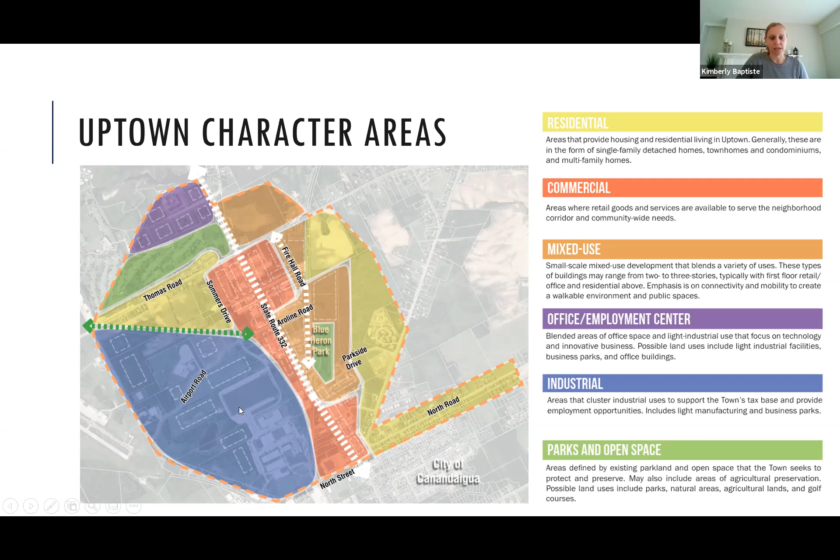So again, just a quick recap: the revised zoning we've been referring back to is based on the Uptown Corridor Master Plan, which included future land use character areas, which you can see here. The areas focusing on today include the areas in yellow, identified as future residential areas, as well as the Office Employment Center, which is the business park district, and then your industrial districts.

Starting first with the mixed residential, just a reminder, as we took that character area map and refined it into an actual zoning district map, you can see the areas designated for mixed residential indicated in bright yellow. So both sides of Thomas Road along Brickyard Road, and within the area immediately adjacent to our form-based code district. The form-based code includes the areas in red and this orangish tan color. So this is really a transitional residential area immediately surrounding the form-based code district.

Again, this really was, you have your multiple residence district already within your code. The overall use with some modifications and design intent are very similar to what we've talked about doing within this mixed residential district. So we use the multiple residence district as a base. Unlike the form-based code, which is intended to be its own standalone document as part of the overall town code, this district will be incorporated into your existing zoning code as a new district. So this will fit right into your existing framework, and all of the other references as it relates to other standards within your zoning code would apply to this new mixed residential district.

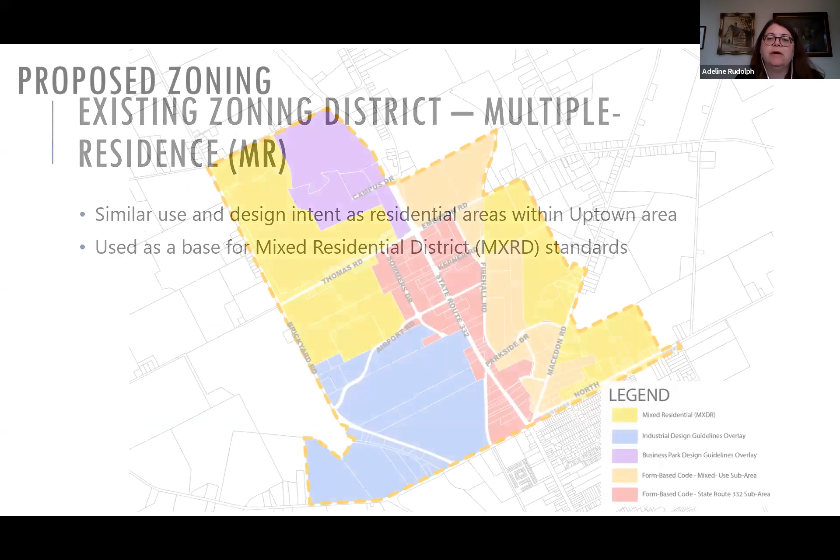Back to that map real quick, Kimberly. So we're discussing the yellow area, not the orange area, correct? Correct. The orange area is included in the form-based code, so this is the yellow area.

Kimberly, my other question would be, if you look at the plazas around 332, I know they're more occupied than what we have occupied in the city at this point, where Ryan's Liquor is. My question really is, is there a pressing need for additional retail? Because that strip mall model is kind of an old model, right? So are you talking about incorporating them inside adjacent structures similar to the residential look? I'm just trying to feel it out, I'm not a big fan of strip malls anymore.

No, but I think that's a good point. Because the form-based code district, which is the red and the orange, allows for a lot of flexibility with the range of uses, and it really is based on building type. The goal though being that that would help facilitate more of that high density mixed use type development, particularly in this orange area along Fire Hall Road, where you would see a combination of higher density residential combined with some supporting commercial uses.

While at one point we had originally thought about these yellow areas as primarily residential and really building on that mixed use district, going from maybe higher density residential to lower density residential, so you might have some multifamily and then transition to townhomes and then to single family homes.

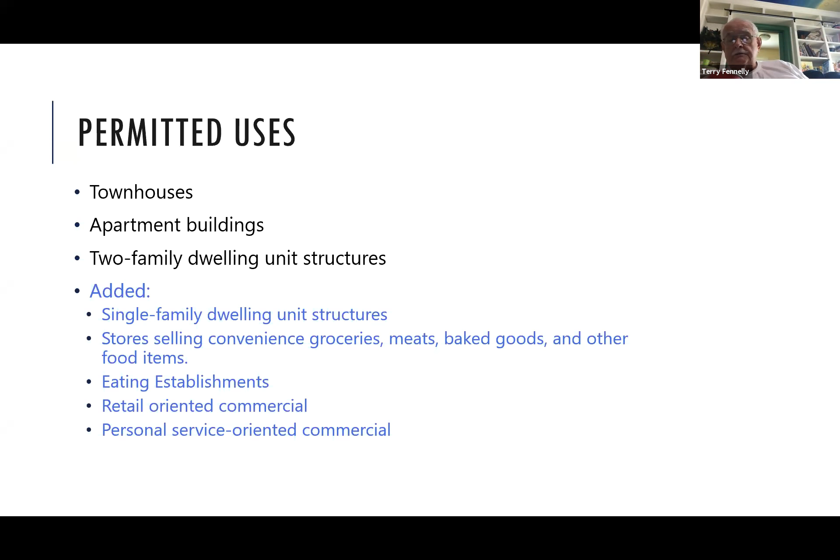I think Kimberly's earlier point about making size restrictions could really help. It's a very different situation when you get a very small, almost bodega sized convenience store as opposed to something a little bit larger. They have very different impacts on the neighboring properties too.

And I agree with both Terry and Adeline. It seems to me if you're trying to build a community, for example, one of those plots is relatively large, you would allow like pods. I think in terms of pods of commercial use, I can see having things within walking distance, which is a great thing to have in a community, having a bakery or a small store or a flower shop or a coffee shop, things like that. And I agree that those should be special use type entities.

Okay, so if it makes sense, why don't we go back and rework the language to add single family dwelling unit structures to the permitted uses. We will make the other uses special permitted uses, and we will integrate size limitations regarding the size and scale of those types of uses. Then once you get that language, you can dive into it a little more and see if it works and meets the goals for this district.

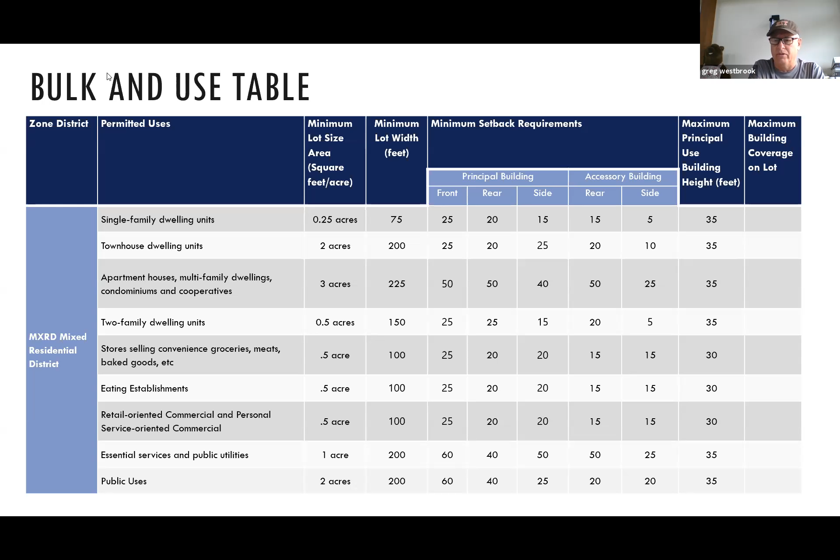And nowhere have I heard a conversation yet about traffic counts. So a burger place would never put a location on Emerson Road, across from whatever Thomas becomes on the other side, because the volume of traffic's not there. And we don't talk about it — I haven't seen it even in the forum discussions. There's just, and you got to plan for that.

I reflect on a few areas I've lived in my life. One is Celebration, Florida, which was a Disney town, all planned, 5,000 homes or whatever it was, and they always had clusters. I think that's what we're trying to describe here — a cluster that serves the community that lives inside that community, some additional benefits of that.

The other one was Tokyo. When you walk away from the station, you're walking everywhere in Tokyo, and the vision here is that we should be walking everywhere, especially to the parks, not getting in our car to drive. I think there'll be an openness to that.

But we also had public uses in here, essential services — we used to have a cop every four blocks in a hut, there all day long. My point is that if we can think collectively about traffic and the services needed for this concept, which I fully support, it may help us come up with a better result. That's all I'll offer.

No, and I think that's a great point, and really is the underlying premise of the Uptown area, where you're seeing concentrations of that diversity of uses within all of this red and orange area. Allowing for a diversity of commercial types, with those requiring higher traffic counts happening along 332, and those supporting a denser, expanded residential base in this outlying area, all within walkable proximity to new personal commercial eatery type uses along Fire Hall Road and Emerson Road.

So I think that's exactly the overall vision for Uptown, and the premise for creating that form-based code district. These outlying districts really support that form-based code district and ensure it is ultimately successful, allowing for that range of support services, because there is a more substantial residential base able to support it.

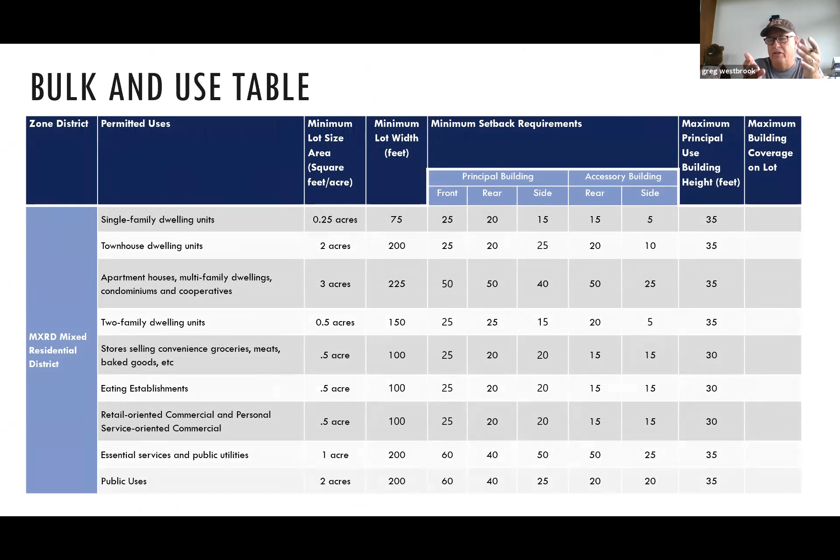Does that make sense? Yeah, but my comment is, I agree with everything you just said. Then there has to be a 'but' there, which is they're going to walk there. That's the assumption—we're going to use our feet more than our cars in this zone. And we've got to also make sure we have transportation capabilities for people that want to go. I don't know if you guys have ever run across 332 at prime time, it's a tough street.

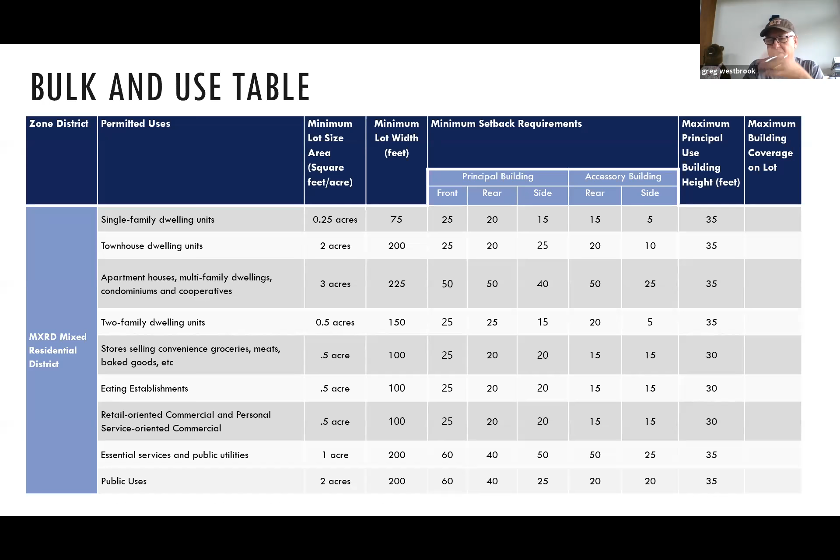Not as tough as 5 and 20 and Eastern Boulevard, but it's a tough street to cross. This past weekend I went to Maze, and my wife talked me into walking over to Tom Walls. You can't really walk over to Tom Walls—it's a bit of work because of the traffic and the speeds and all those kinds of things. So as we think about that, I think we just got to keep that in mind.

I'll stop there, just to say you've got to keep in mind that it's a complete unit, and let's play to the strengths of the unit versus trying to force a strength in a certain district in a certain way. That's all I'll say.

This is one of the areas that the Complete Streets group really was focused on also, Greg. It seems to me that would have to come into play.

Doug, aren't there some drainage issues up in this area that, for some reason, come into play when you look at maximum coverage, impervious coverage on lots? Seems to me we've heard Jim talk about some drainage issues there. Yeah, depending—am I mistaken?

This whole area, a lot of it is in the Route 332 drainage district, and we've got some ponds that are actually functioning as Route 332 drainage stormwater ponds, essentially, with a park built around them at Blue Heron Park. But there are some wetlands, some different delineated localized wetlands that have been identified on some of the parcels we're talking about for development, even on the map Kimberly is showing.

Kimberly, another question I have - I see you have maximum building height for an apartment house of 35 feet. My guess is we're not going to get too large of an apartment, but I believe the plan, correct me if I'm wrong, is to have the higher buildings closer to Fire Hall Road towards 332, and then as you transition back, the building heights get lower to taper into the other areas, right? Yes, and that's a good comment too, one for further discussion.

Recognizing we have some frontage on the roadway, with that form-based code allowing for higher heights, I think we went up to 65 feet - whatever the hammocks was at, either 60 or 65, I'd have to double check. The thought was, if we've got that higher height within the form-based code district, maybe we'd want to taper down as we get into the mixed residential district. But if that's maybe 45 or 50 for apartment buildings, not 35, that's certainly something we can modify.

That's a good point, Doug, because if you're going to do a 2-story building and you wanted to have a decent pitched roof on it so it looks aesthetic, so it looks nice, you might go higher than 35 feet.

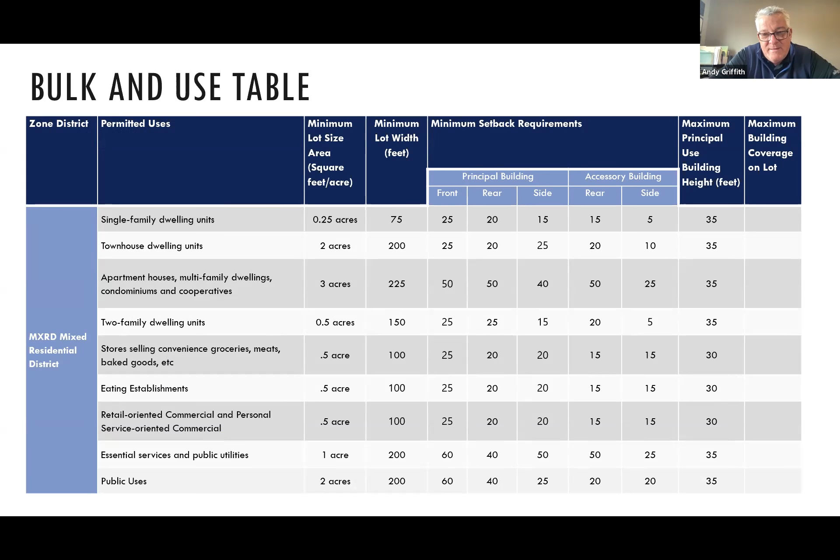Okay, well what we can do in the interim is actually put in percentages for both maximum building coverage on lot and maximum impervious surface, and then based on your more detailed review when you get the hard copies, we can discuss that further - how we want to ultimately land as we move forward at our next meeting.

Kimberly, in terms of maximum lot coverage, I know in the RLD I think we're at 15 and 25%, but that's because of the sensitivity of the parcels adjacent directly to Canandaigua Lake. What do other communities do for maximum lot coverage in a parcel that isn't adjacent to Canandaigua Lake, like what we're talking about?

Yeah, and because this is an area where we're thinking higher density, but we also want to make sure we're incorporating green space and allowing smart growth design, I would think we'd probably be, for impervious surface coverage, a maximum in like the 70% range - 60 to 70.

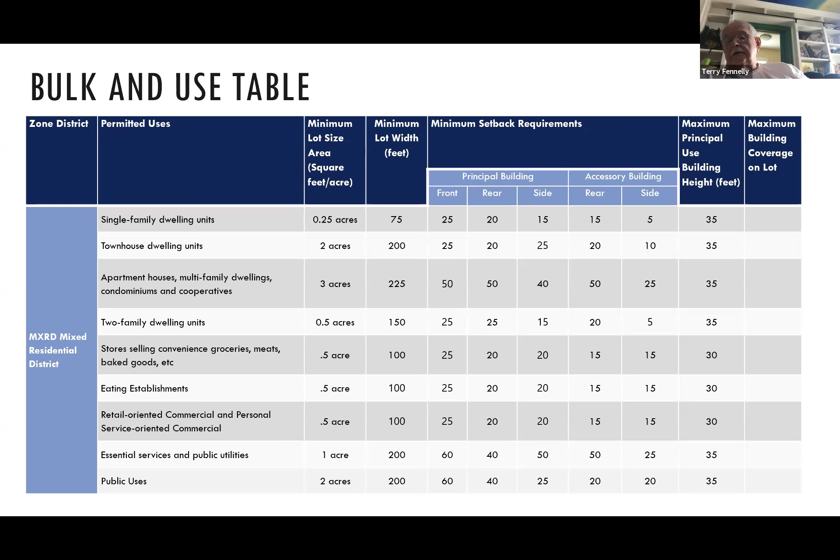Well, a quarter acre lot for a single family home is about 10,000 square feet, so you'd be talking about 7,000 square feet of coverage, which would be pretty high. I mean, just a typical 2,000 square foot house, if it's 2-story, probably has a 1,000-foot footprint and then a driveway.

Yeah, and the 60 to 70 might - I was thinking more of the commercial. You might be down to more like 50 for residential, because you're including your driveways, any accessory structures. But the other calculation is also related to what Terry brought up, which was stormwater runoff, right? And how that gets handled properly would be the driver - the ability to handle it in the community you're trying to put it in, right?

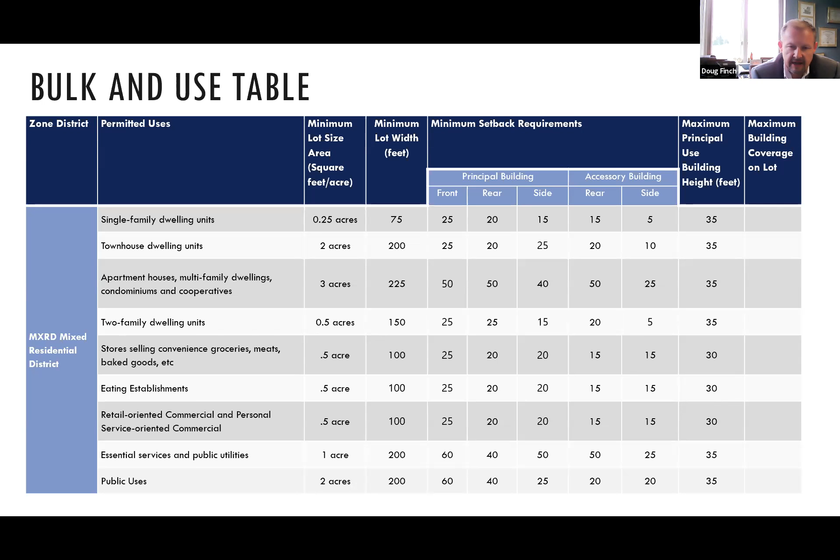Well, to that point, I like to think improvements and engineered solutions will help, but we have had, over the last 5 years - there's been days, I remember a Sunday specifically where Jim and I were out there during a heavy rainstorm and the water was up to our knees in places along this area we're talking about. So it does have to be factored in for sure.

A quick question - is any of this new mixed residential district touching the Paddleford Brook Greenway at all?

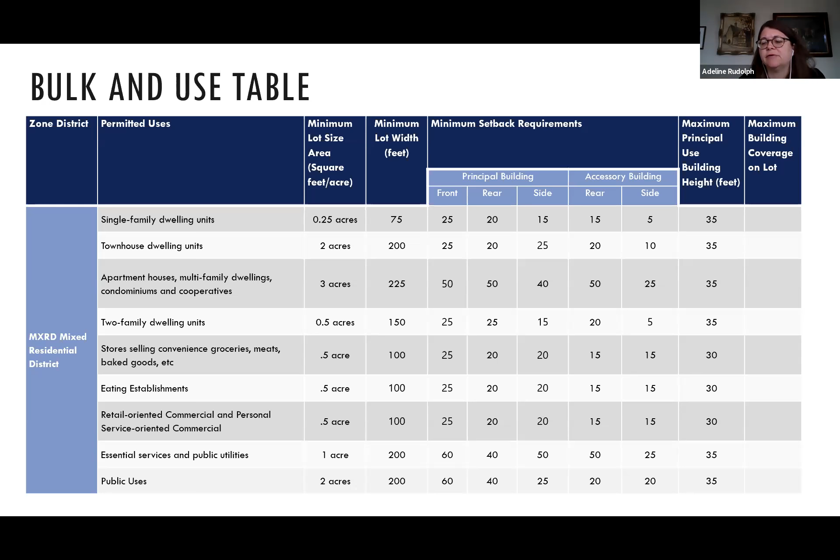So Adeline, the Paddleford Brook Greenway - this line follows Emerson Road, generally speaking, out at Sand Hill Road, roughly speaking. It kind of follows this northern line across from Campus Drive. So this one parcel in the tannish color would butt up to it, but the mixed residential would not at all be part of or adjacent to the Paddleford Brook Greenway. Okay, thank you.

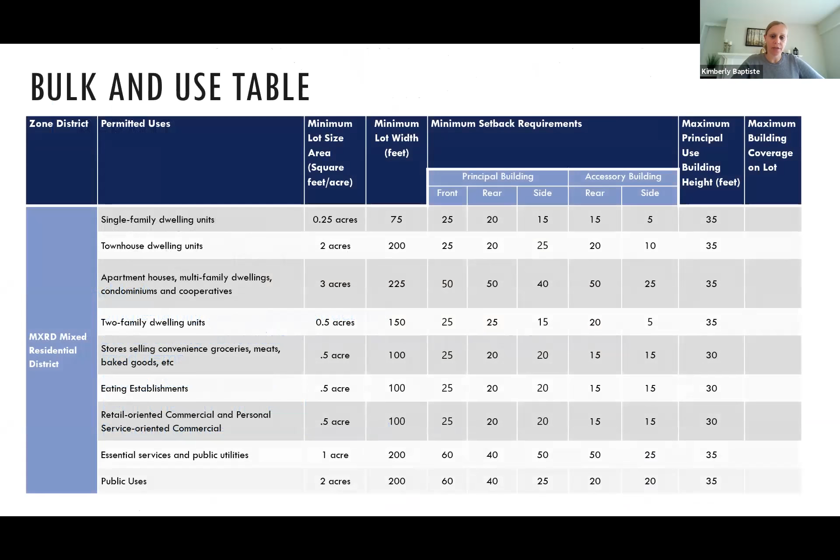Okay, and then just a couple other questions - these tie back to the fact that at least on the east side of 332, and even on the west side to a lesser degree because it's tucked in between the industrial districts, the mixed residential is adjacent to the form-based code district. So are there any elements from the form-based code that we want to continue into this new district? One of those being the requirements for outdoor amenity spaces for certain types of development.

So obviously this would not be applicable to a single family home or a 2-family home, but maybe for larger scale residential developments, a requirement for minimum outdoor space to support that residential development. So that's something we incorporated into the form-based code for mixed use developments.

Also, are there any special parking requirements we want to incorporate similar to what we've done in the form-based code? For certain scales of development, having requirements for bike parking, and requiring sidewalk connectivity within larger scale planned developments. So any thoughts on those, or whether you'd like us to add language supporting these concepts in the zoning updates?

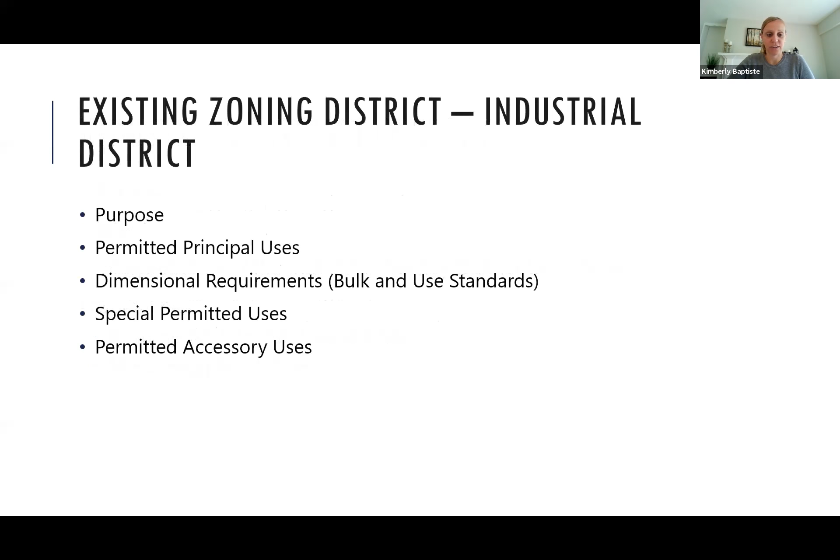So the intent of the overlay district is really to promote high quality architectural and site design that's compatible with the surrounding area, recognizing the surrounding area is intended to be walkable, inviting, and a mix of different types of commercial and residential uses. It's intended to promote safe, functional, and attractive development, and also encourages sustainable site and building design to reduce any negative environmental impacts.

So the building - can we make a comment? Sure. The architectural - go back to the prior slide, please.

The site plan encourages high quality architectural and site design. And yet the vast majority of that, with the exception of where Akoustis is, already has its architectural tone, I'll call it, right? And I wouldn't consider pole barn construction to be of architectural significance. So I just want to make it real, right?

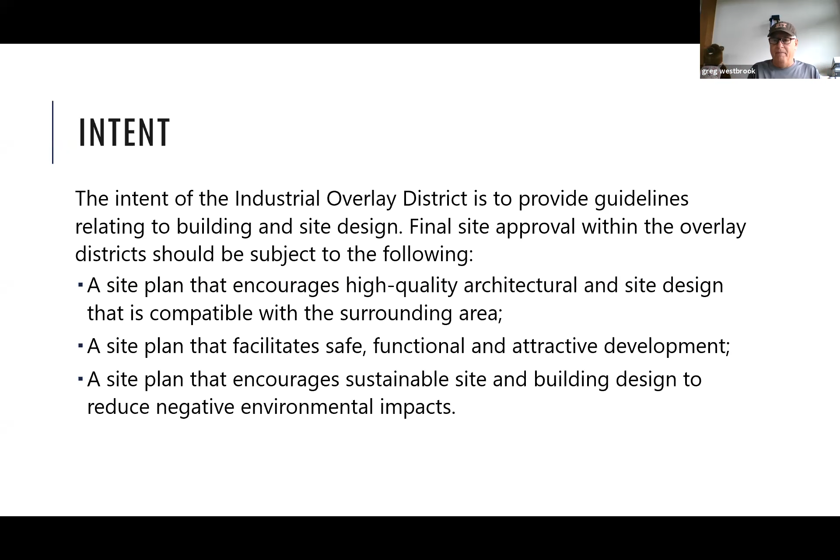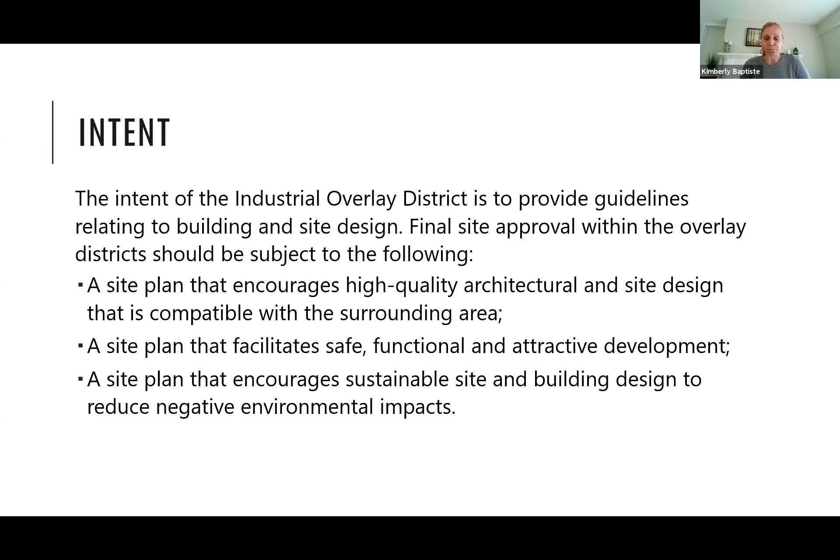Yep, and that's a good segue into the conversation, right? As we walk through some of the design parameters that we're proposing, understanding - is this too far in one direction? Are we requiring too much? Do we need to claw back on some of this? That's really where we're looking for this group's guidance moving forward. We've talked about that in the past too, right? Recognizing there needs to be an appropriate balance between what you're requiring these types of uses to do with what you're hoping to achieve in the built environment. So I think that's a good segue, and probably will have more discussion around that as we get into some of these building guidelines.

So our first area of focus is really on the primary facade - the building facade that you're seeing from the street. The goal of the design standards here are really to avoid large undifferentiated wall surfaces on the primary facade. So what we're proposing is that structures more than 50 feet wide on the primary facade would be required to break up that facade with different delineations and different treatments, so it doesn't look like just a massive wall along the streetscape.

I'm going to bounce back and forth here to some of these images. So here, for example, this wall exceeds 50 feet, breaking it up with kind of a minor exposure here, jumping out a little bit. You can see the changes in the facade in this building as well, as opposed to here where you really do have just a massive industrial wall. So it is this type of treatment along the primary frontage, along the street frontage, that we're trying to avoid ultimately.

And then, not requiring all of those different delineations like a canopy or arcade, but those would be allowed as part of the treatment for the wall surface.

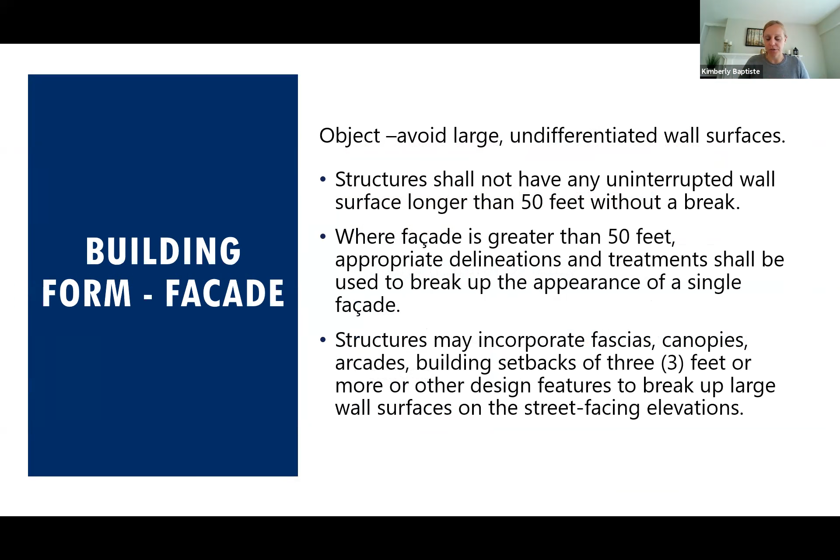From a materials perspective: masonry, stone that's either natural or faux, concrete, prefabricated steel panels, corrugated metal. We'll talk more about that. Stucco, EIFS, glass - all appropriate materials.

So looking again back at these examples, you've got a stucco example, an EIFS example, concrete, and then here you've got a metal building, although you can see it's broken up with natural materials along the primary frontage.

So one of the questions we have for you is: is that list of materials appropriate? And if so, when you're looking at materials like concrete or corrugated steel, do you want to require that the use of them on the primary facade is limited? Maybe it's 50% of the primary facade, and it needs to be balanced with another material like faux or real stone or masonry.

So I can go back to that list and we can talk a little more about materials. Kimberly, I think there's one other element here, which is the measurement of the distance from the road where you're viewing that building to where the building sits - it's 500 feet back. It doesn't make a difference if it's stone or anything else, right? But if it's on the road, that's what you're trying to accomplish here - if it's closer to the road, you're trying to accomplish a differentiation that makes it look less industrial. But if it sits back like Pactiv sits back, even if they built a new Pactiv today, they probably wouldn't do the exterior differently because it's not visually impactful to the person on that road.

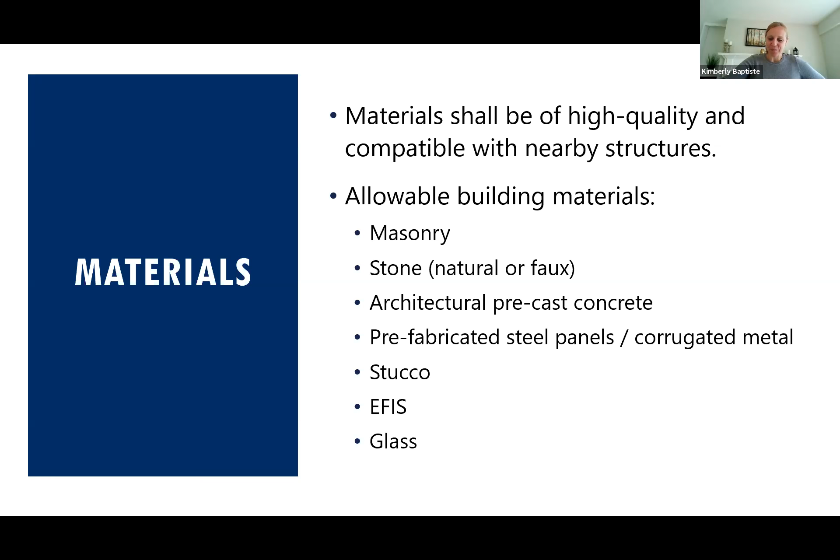I do agree with the variation in appearance from the road. But from what Greg said about Dave Janeco, I frankly don't feel sorry for him. I am really in favor of landscaping that fits the area where the building is being built. If it's going in the uptown area, you have to think in terms of landscaping because it's such a diverse area, and you want to make sure it's acceptable to all of the occupants of the area. So I think landscaping is an important issue to include.

I'm not even a member of this committee, so maybe you don't have to listen to me, but I think landscaping is an important issue to include. Yep, and we do talk about landscaping in the site design section.

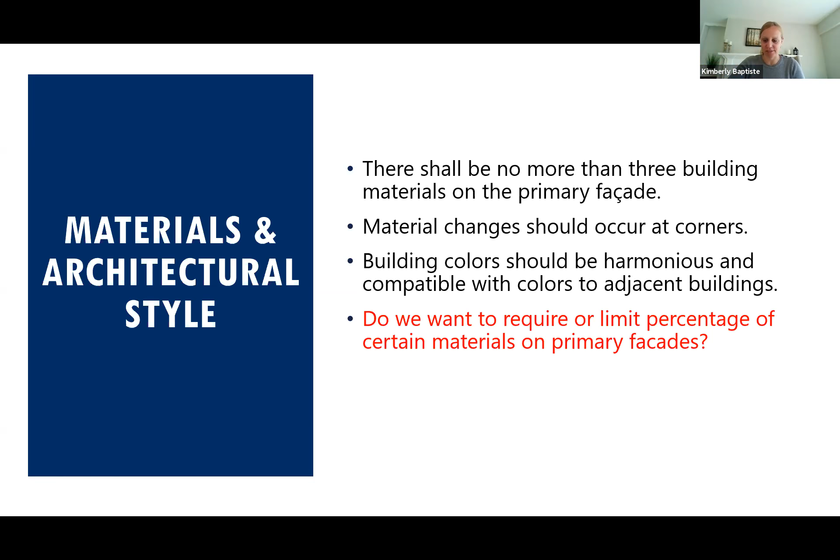On the landscaping side, another story - when I built the solar farm on County Road 10, I was told by the planning board to put in a 20-foot wide buffer of flowers. Frankly, it's overstretched in the industrial zone. I just don't want that power to go to those folks that make those determinations. These are not suggestions, these are determinations you will put in. I can give you a whole story about that, but I'm not going to go that deep. My point is, remember who the audience is, who's the user, and what is the purpose.

That's all I ask. Exactly, I agree. I agree with that. Yes, okay.

So with regards to site design guidelines - again some of these may ultimately get taken out - because of the desire to create a strong walkable mixed-use uptown area, where employees of these industrial uses can walk out the front door, walk to 332 or Fire Hall Road, grab lunch, grab something at the pharmacy on their lunch break, we wanted to take that into consideration. Recognizing these are still industrial users that have a job to do with their site, we're proposing and requiring a strong connection between the building entry and the primary street, ideally including a sidewalk to strengthen connectivity between the users inside the building and the larger uptown area.

If there's multiple buildings on a site, there should be pedestrian connections between the structures and the parking areas to foster that walkability and ease of use. So any initial thoughts or reactions to those requirements being incorporated?

I think it's good to also require the pedestrian connectors. But I will mention the thing that no one ever likes to talk about, that I've been asking about since I was on the Complete Streets Committee - we do not currently have a town policy for who maintains sidewalks, that I'm aware of. Someone eventually is going to have to address that with the added sidewalks.

So loading and service areas, we've addressed and stated that loading dock space and service areas shall be located on non-primary facades. We don't want them on the primary facades, we want them towards the rear of the building, which we recognize may not always be feasible based on lot size or the use and how a specific use needs to move around the site. So it could be approved by the planning board with appropriate screening, but in general, loading dock space and service areas would not be located on the primary facade.

And then the second bullet might be too strong, where we're saying storage, whether it be trailers or containers, cannot be stored or utilized on site. So if that ends up being a need, or something you feel might be something industrial users are strongly opposed to, even though we say they could ask for permission, we can certainly take that regulation out. Any thoughts on those?

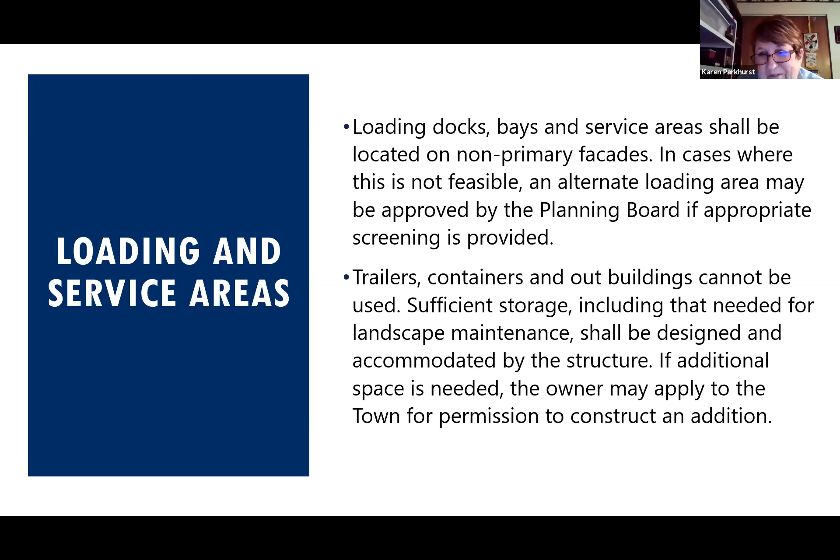Okay, so we will amend that. And then with regards to that same vein of conversation, refuse storage located in the rear and buffered from view of parking facilities, walks, and adjacent properties. Based on that past discussion, we can certainly soften that language. We would like to see garbage located within an enclosure, so that's screened 100%.

But aside from that, I think we can take your comments in this discussion into play and refine this section, and really just soften it and make sure there's enough guidance, but enough flexibility written in as well.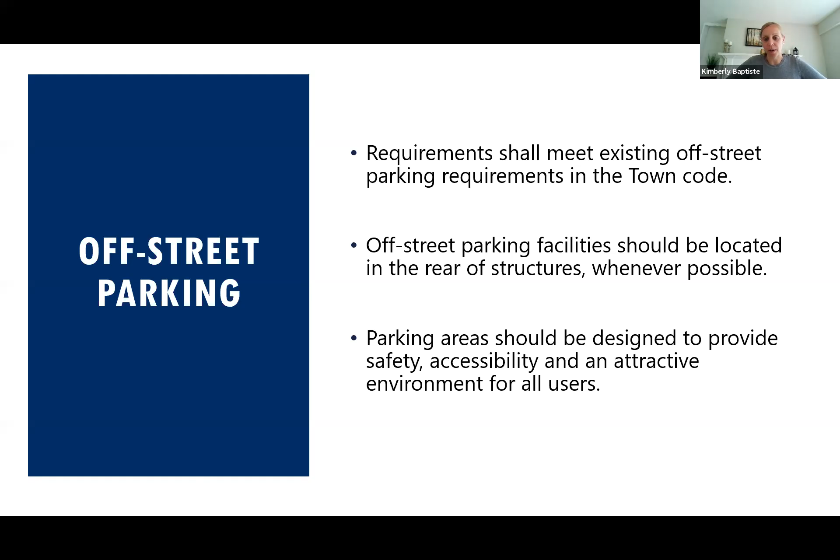Landscaping and buffering - meeting the existing buffering requirements in the town code, we have added, and this might be stricter than folks are comfortable with, but to avoid the look of just an island of asphalt parking, we have added requirements for parking islands within parking areas of 10 or more spaces. I don't know what folks' thoughts on that are, and if that's something you're okay leaving in as a requirement or would prefer not to require.

And that parking lot number could be changed, right? It could be parking lots greater than 30 spaces need to incorporate a landscape island. It doesn't have to be 10 or more. Any initial thoughts on that?

Well, this is in our existing code. With regards to the landscape islands? Yeah. Is it? Okay, I'm not sure. Oh, I don't think it's required in your existing code. So this would be a kind of added requirement specific to this overlay - specific to Uptown and just the general desired character for this area.

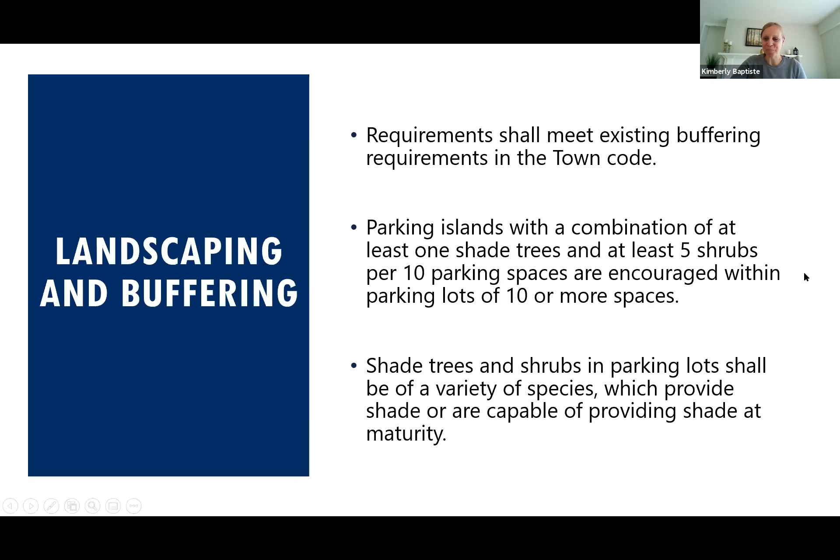Lighting would fall back within your existing code. None of these should be particularly cumbersome. The kind of big change would probably be the lighting of pedestrian walkways being required - so if you do have that walkway connecting the front entry to the sidewalk and the public right of way, there would be some requirements for using pedestrian scaled lighting along that walkway to ensure it's safe and accessible even in the dark.

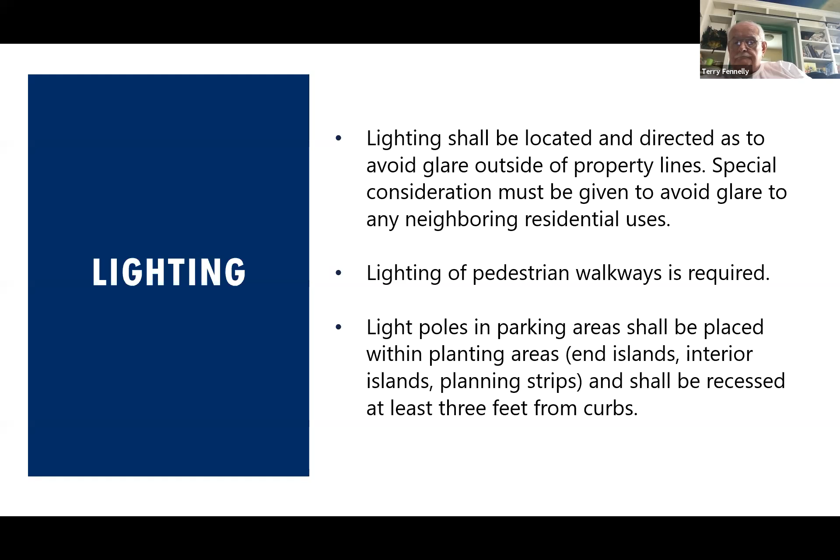So that is it. We will make modifications to the narrative that we've prepared based on this conversation, and then we will get that out.